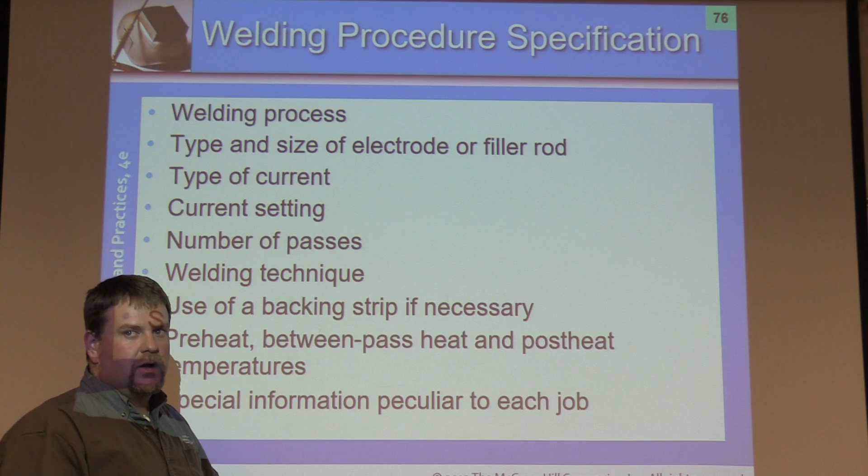This is where we start to see why I talk about the essential variables. All these things, you start changing one of them. Welding technique, for example, whether it be a stringer bead or a weave bead, we're putting a lot more heat in on a weave bead. However, we're filling it up and putting a lot more iron in. Stringer bead's going to be less heat, but it might take a little bit longer to do because you're going to have more filler passes to clean and so forth.

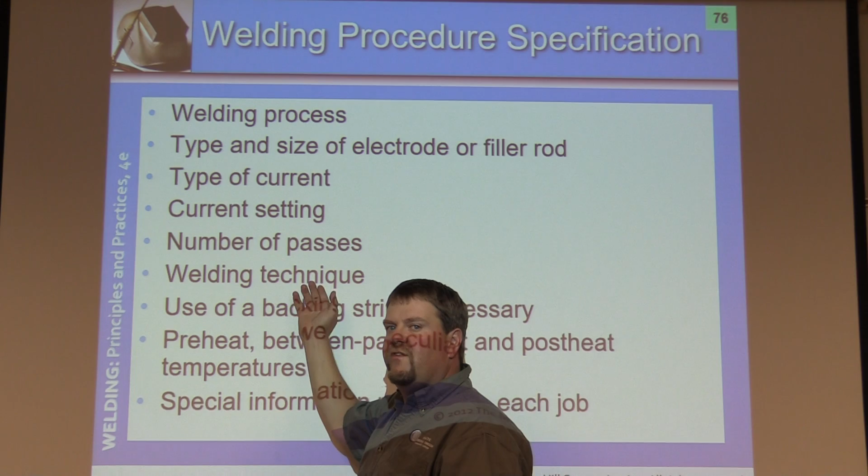If you change any of these variables, say the welding technique, whether it's specified as stringer bead or weave bead, and you change that variable, it's no longer the same procedure. It needs to have a new procedure written to it.

Same thing with diameter and wall thickness of pipe. Most codes will tell you, for ASME, if you weld a 2-inch pipe, you're qualifying 2-inch pipe, you're good for everything above and every diameter above that. However, your wall thickness is still limited. Now, if you qualify on a super coupon, you're allowed to go up to—a super coupon is going to be 5/8 inch thick wall, a real heavy wall material.

If you weld that out and pass that test specifically, then you're allowed to weld up to 1.5 inches thick, from 1/8 of an inch thick to 1.5 inches thick pipe wall, any diameter whatsoever. That's why it's called a super coupon. If you can pass it, for most common weld purposes, most common piping systems and sizes, you're going to be able to weld all of those.

Root opening, everything, position of welding—uphill to downhill—you don't just get to choose. It's either uphill or downhill or both, but in the exact order it needs to be. You don't just get to start choosing and say, hey, I'm going to weld this downhill or uphill.

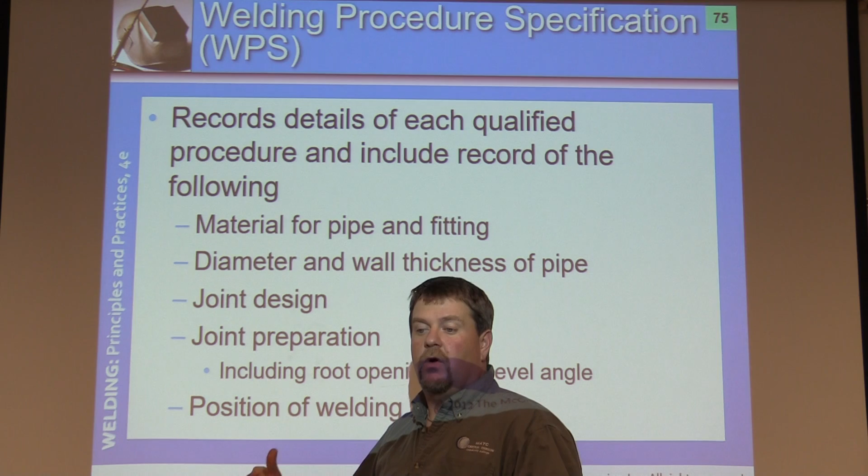Now, if there's no code, if you're not welding to a code, then yeah, you can change the majority of this. But if you're on a job and you're welding to a code, you have to follow that procedure. That is crucially important. So many people go out there and they think, well, I'll just weld it the way I've always welded it. No, you're no longer following the procedure. You can, and more than likely you're guaranteed to get fired by doing that. You have to follow the procedure in order for the insurance company to cover it.

Now we come back to the procedure qualification test. So what we're going to do, as a CWI, say somebody sends me—say an engineer sends me a procedure, a WPS, a welding procedure specification. That's the spec, that's the procedure. Then what I need to do is create the PQR, the procedure qualification. This is a test, but I'm going to record it.

So it's called a procedure qualification record. I'm going to follow every one of these variables right here in this procedure. I'm going to make sure the welder's doing it, or I'm going to do it. Make sure everything aligns. I'm going to record it. I'm going to time you. You weld one welding rod.

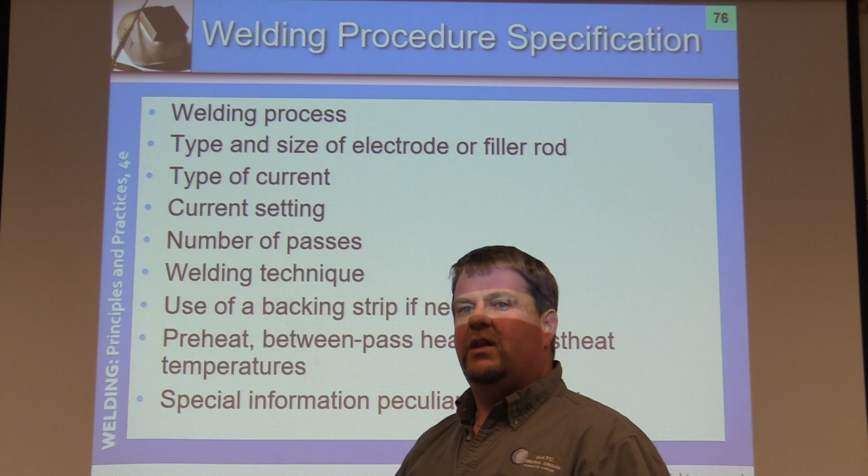You're going to start welding. I'm going to start the stopwatch. You're going to weld, say, 4.5 inches in 45 seconds. I stop the stopwatch. I measure how far your weld is. I'm going to put that in. We're going to calculate the heat input. I have to record that and put that into the values of the procedure qualification record.

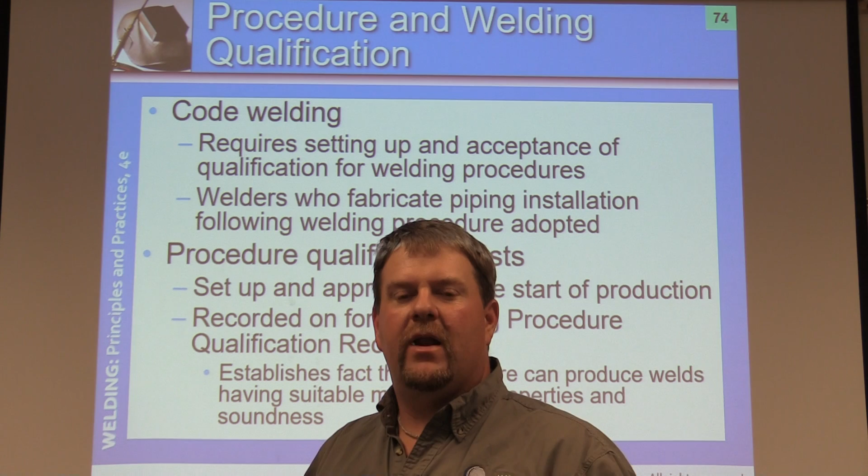So the WPS says this is how we're going to do it. The procedure qualification test means I'm going to come back and prove that the mechanical properties of this weld are compatible. The mechanical properties are able to be joined together, it's able to be welded, and they're compatible. There's not a problem with that portion of this. It establishes the fact that procedures can produce welds having suitable mechanical properties and weld soundness. Again, we're not done yet.

Weld soundness depends on the welder performance as well. But if the welder performance is good, it should be a sound weld.

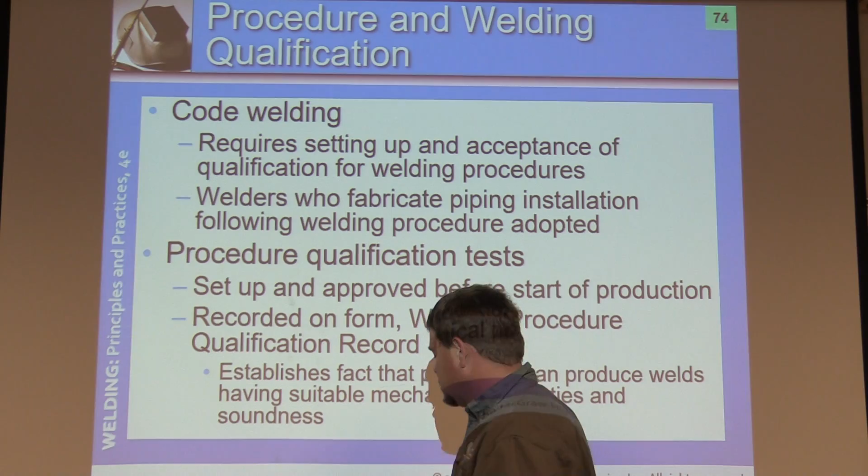Now, we go up here to the code welding. So the next step is going to be a welding procedure qualification record, or a test. So now it's called a WPQR. Now what that means is that you physically performed that weld within the guidelines of the procedure.

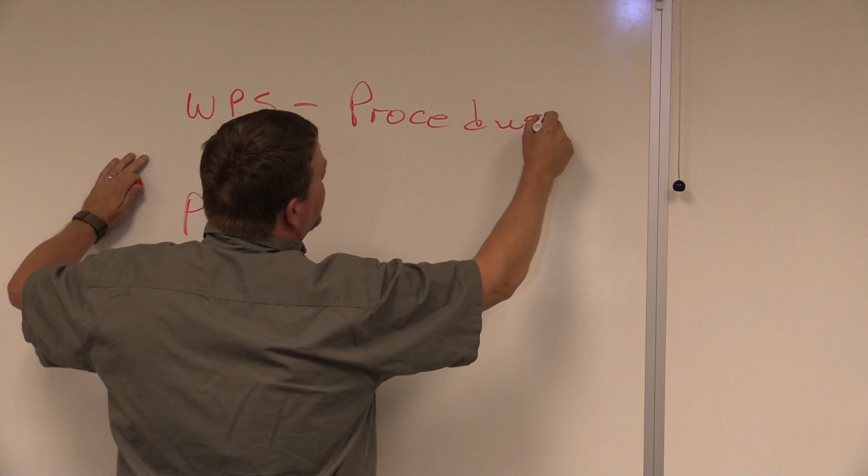So, WPS, Welding Procedure Specification - I'm going to abbreviate it. I recommend that you write this down so you know it. This is the procedure, these are rules to follow. This is your recipe.

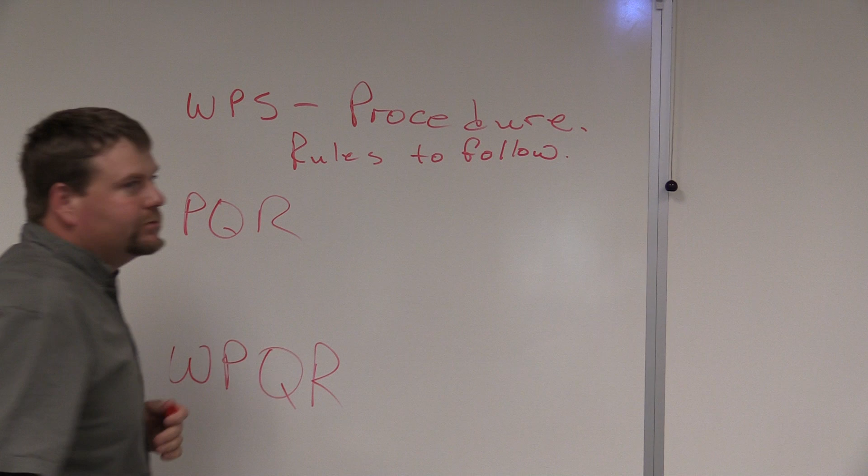The PQR, Procedure Qualification Record, this proves mechanical compatibility.

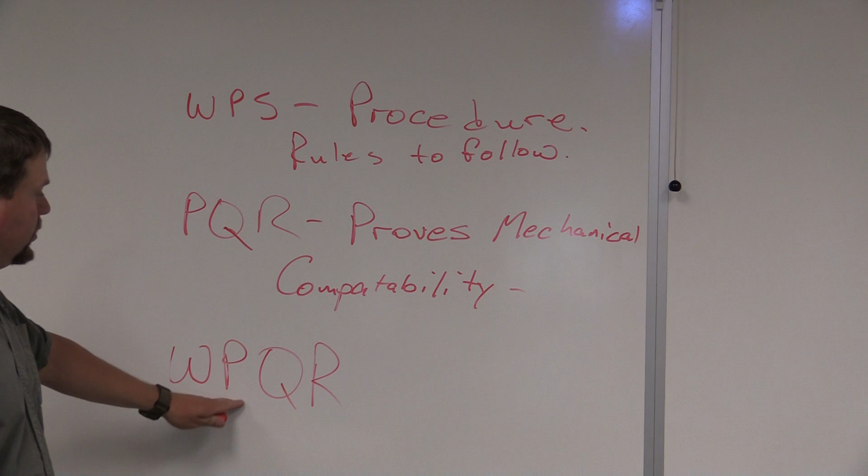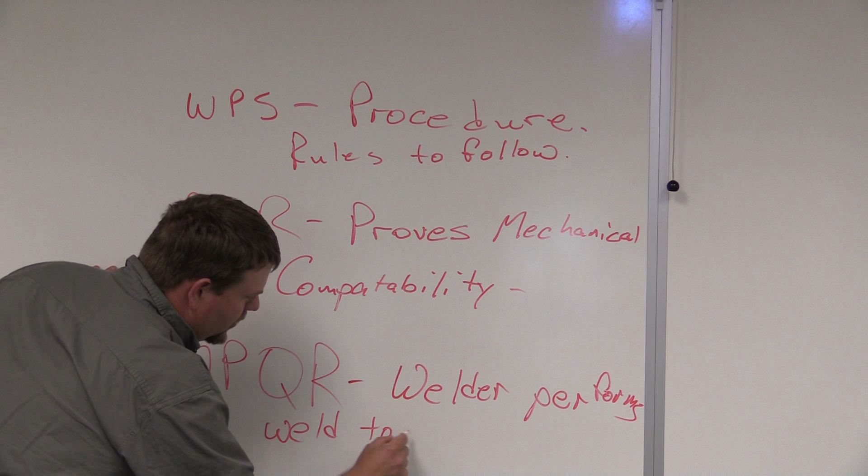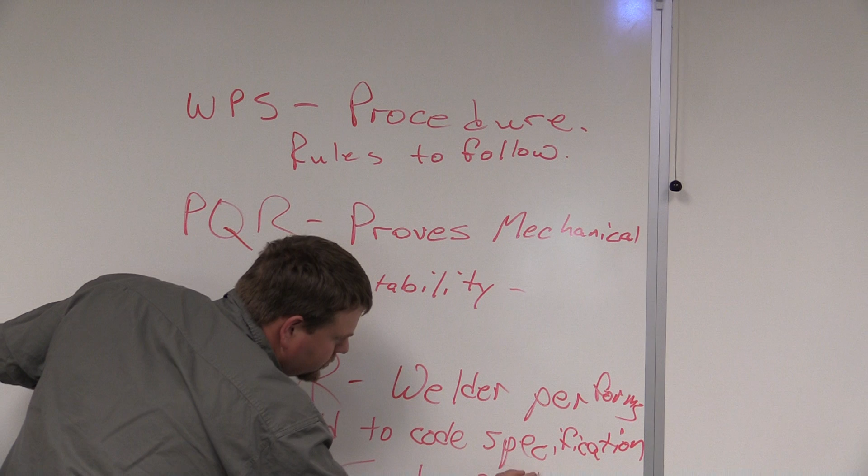Now, the Welder Performance Qualification Record means that the welder performs the weld to code specification. This is a sound, good weld. I would make sure that you write that down and you understand the three very well.

Now, a lot of times there's a difference between a tested or qualified welder versus a certified welder. So let me clarify this real quick.

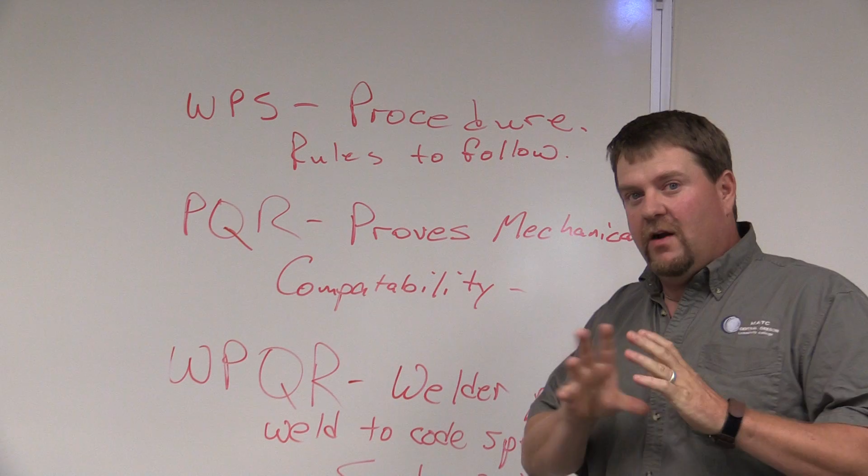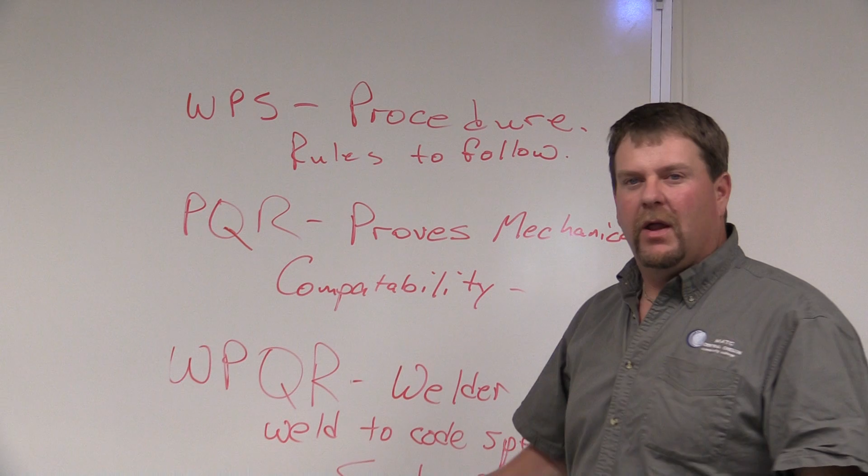You can take this test, the Welding Performance Qualification Test. If you produce this weld applicable to code standards, then you are a qualified welder. That means you are able to do this.

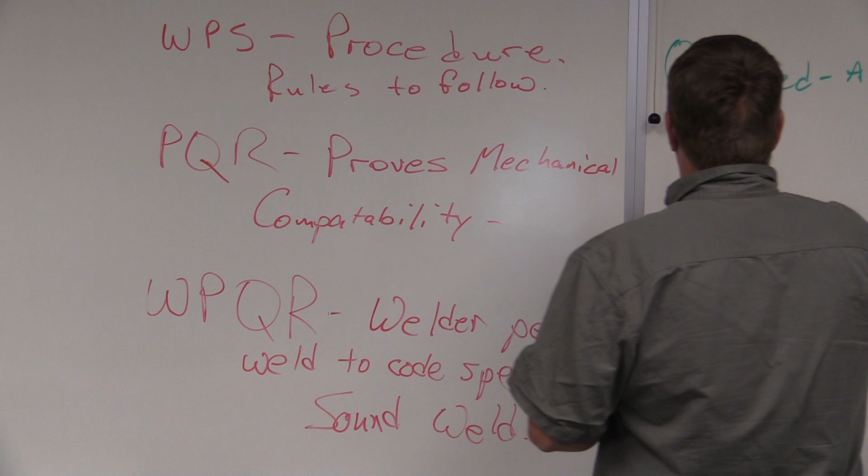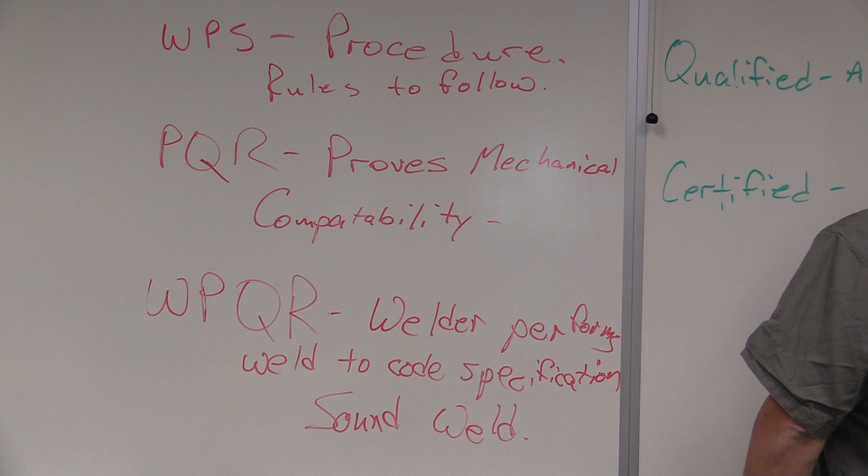Now, once we are done with that, then what happens is, for example, me as the Certified Welding Inspector, I will write the papers to document it. So I'm going to switch over here.

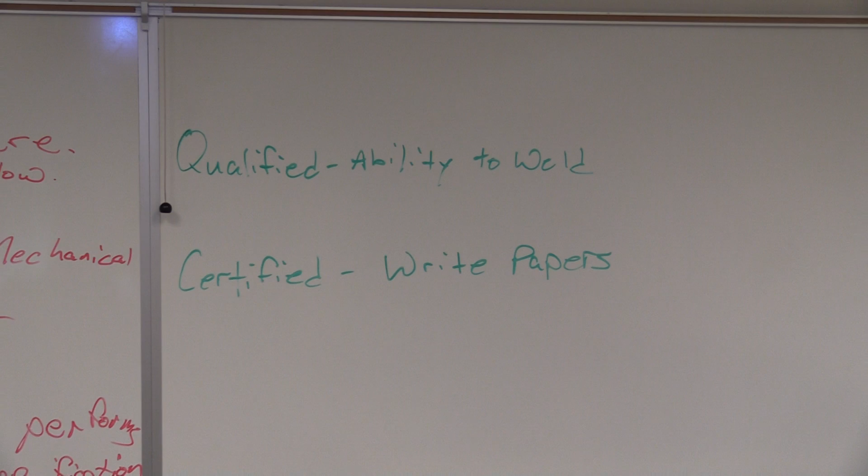Qualified is the ability to weld it, it means you passed it. Certified means that now the inspector or the qualified person has written you the correct documentation to prove that you are a certified welder.

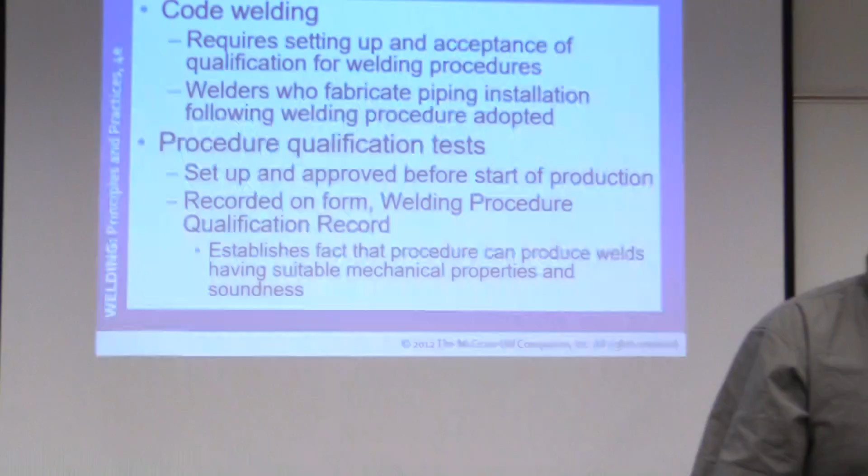Certain changes can be allowed. However, typically most companies and most insurance companies are very hesitant to do that.

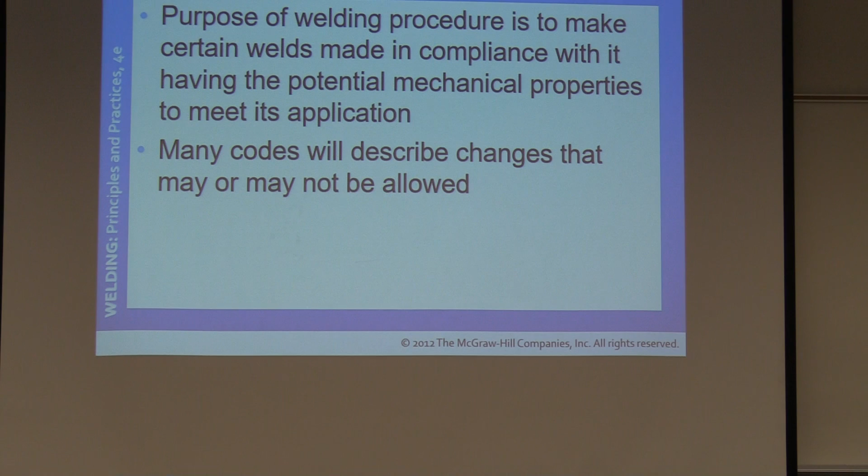Here's your essential variables versus your supplementary essential variables and non-essential variables. Those in which change is considered to affect the mechanical properties of weldments shall require a requalification of the WPS.

So that means if you change the material, the pipe material that you're welding, from an X52 to an X42, or from an X52 to an X70, it's automatically an essential variable - you have to requalify that procedure. You don't just keep welding on it.

Supplementary essential variables - this is an addition. They're required for metal, where notch toughness tests are specified. This comes into play when you start seeing a drastic temperature change.

Something where the service condition is going to see 250 to 300 degrees versus sub-zero outside temperature, where you don't want your grain boundary to shrink, creating fatalities or safety issues due to elements changing within the weld and the metallurgy.

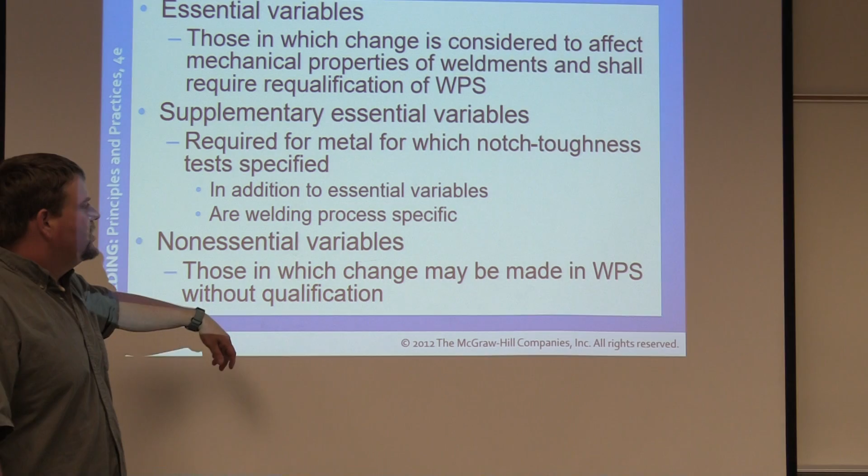Non-essential variables are those in which changes can be made in the WPS without qualification. So usually what happens is they'll give you a range on the procedure.

So say the size of electrode that you're using - they may tell you 3/32 inch diameter up to 5/32, and give you a range. You can use those three different sizes: 3/32, 1/8 inch, or 5/32.

If it was 5/32, and it may say you can go lower - those are non-essential variables. However, they usually give you a range, and there's a certain way you can go. If you weld with a larger size, then typically you can go lower, however there's more heat input for the larger electrodes.

So if your procedure states 1/8 inch is the max, you cannot go to a 5/32 inch diameter electrode on your welding rod. That's considered - the heat input changes the metallurgy, then it becomes an essential variable, not just a non-essential one.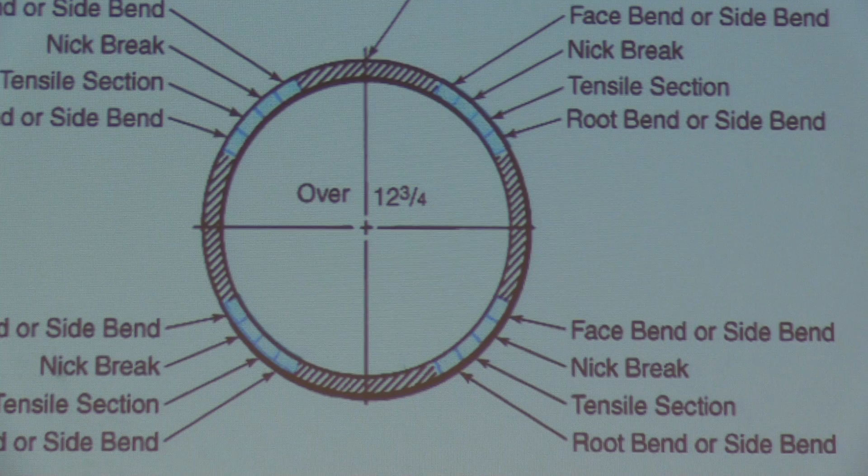So we talk about essential variables - let's look here, over 12 3/4 inch diameter. Now, if it's under 12 3/4, we won't have to pull as many specimens.

So this is 14 inch pipe, or most typical say 36 inch pipe, 24 to 14 - let's go with that. When I'm done welding this, I'm going to have to pull 16, cut out 16 different coupons and test them.

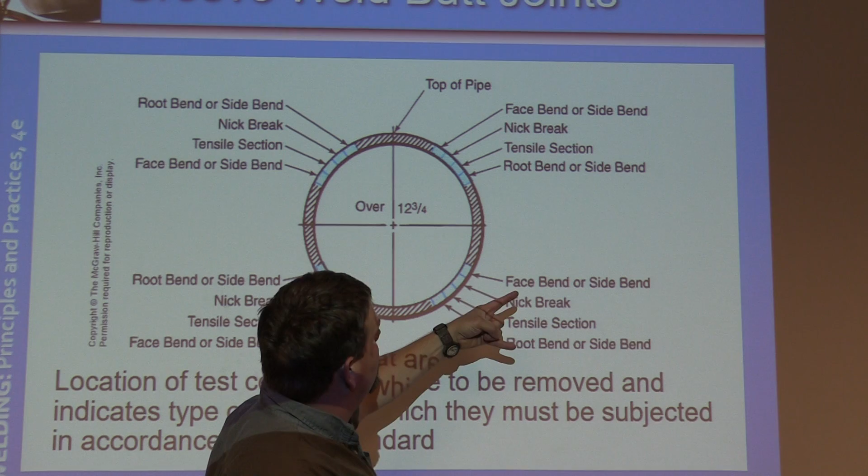As you can see, this has got a root bend, a face bend, face, root, face, root, face, root. So right there alone, I've got 2, 4, 6, 8 welds, 8 bends that I have to make out of this pipe. In the shop, we only do 6 inch, you're only going to make 4. Now, all of a sudden, I've got 4 times as many.

2, 4, 6, 8, and twice as many. We're getting to it though.

Now this right here, this nick break, this is specific to API 1104 alone. So where we take it, we put a nick in it in the center of the weld, and we pull it apart to see if the internal parts, specifically slag along the hot pass, is present within that weld.

So now we just picked up 4 more tests, right? Then we're also going to take a tensile section. What they do is we're going to put it in a tensile machine. We're going to measure how much force it takes to pull apart. Now it also has to break outside of the weld zone, and if it does break within the weld, the pressure it breaks at has to be at least above the tensile strength of the pipe.

See the essential variables? There's a ton of this stuff. So now, instead of the 4 we do in the shop, now I have 16 coupons, and if any one of them fails, I fail.

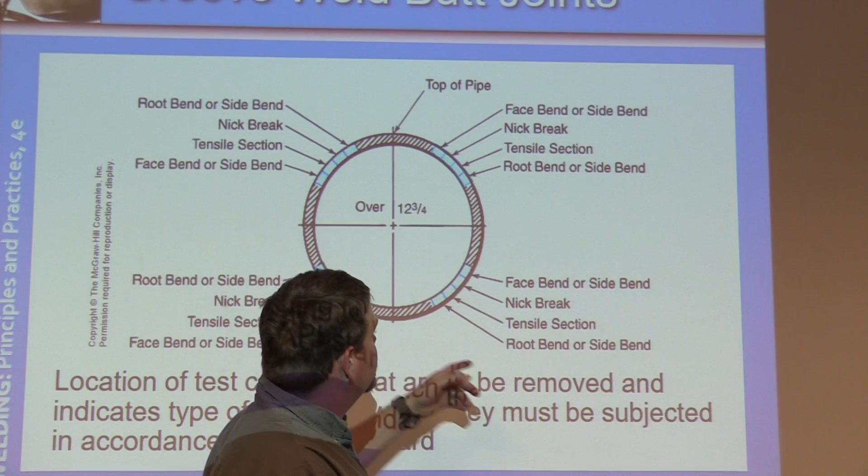So a lot of times, people don't understand. They'll go in there and do our plates, and you're going to pull out 2 coupons. When you get into production welding and high production welding, usually if you're doing this, you're going to be paid very well for it. But every time you pull on a job, you have to do this test. And you've got 16 coupons that have to pass. Not half of them, not 70% of them like we get here in class.

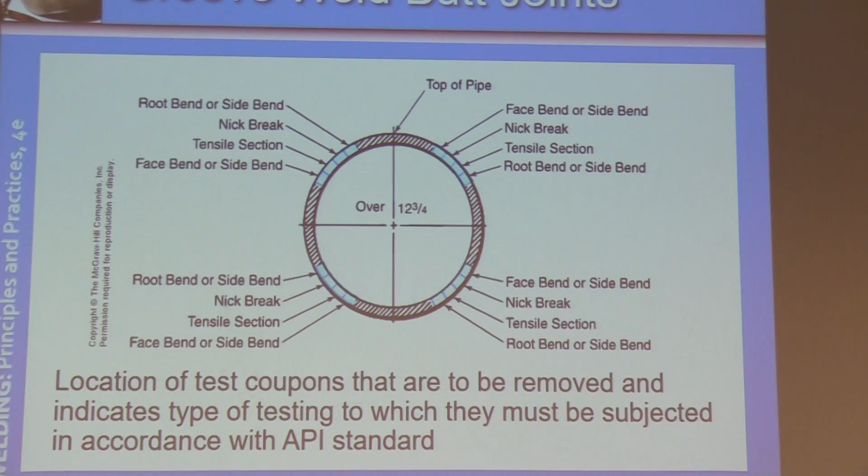As a production code welder, every one of them has to pass within 1/8 of an inch. So that's 16 coupons. It's a lot of stuff, a lot of pressure too. Usually your job is directly tied to making sure that you can pass that weld.

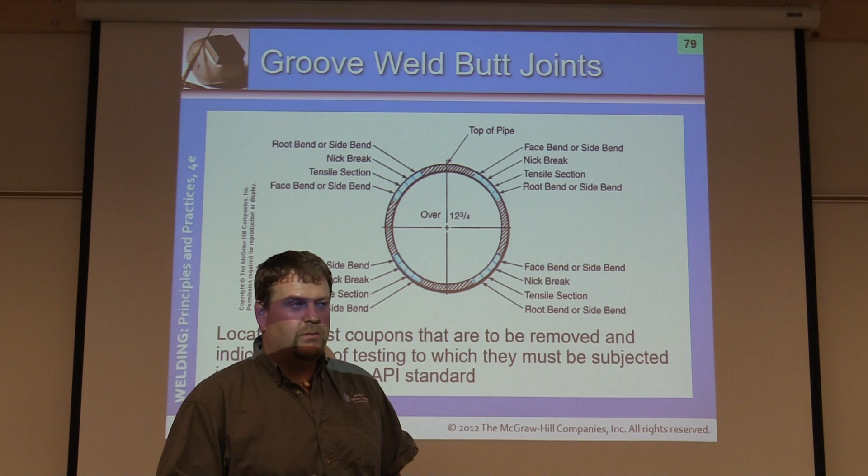That's an API code, pipelines and so forth. Yeah, they don't want anybody just welding on chemicals and so forth, or on piping that's carrying chemicals, all right?

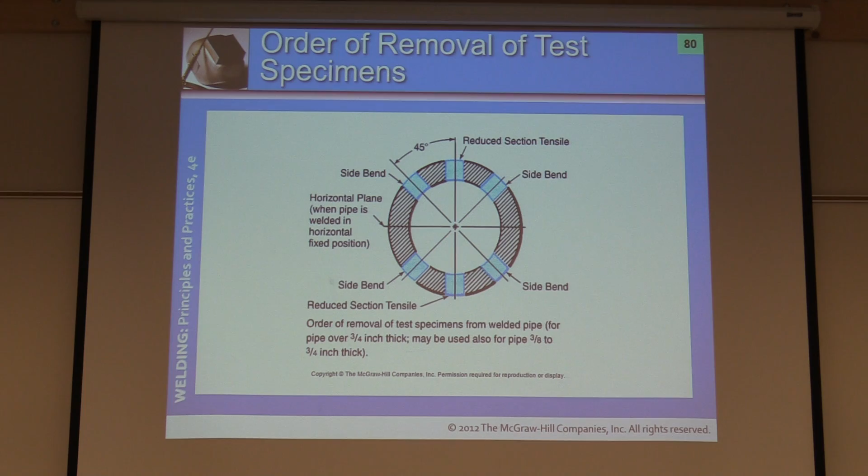Okay, so removal of test specimens. This one's an ASME, or this is also an AWS. This is for a procedure qualification record as well, okay? This is when your wall thickness gets higher than 3/8 of an inch. So right down here, when we start dealing with codes, there's an old saying that the details are in the fine print, right there.

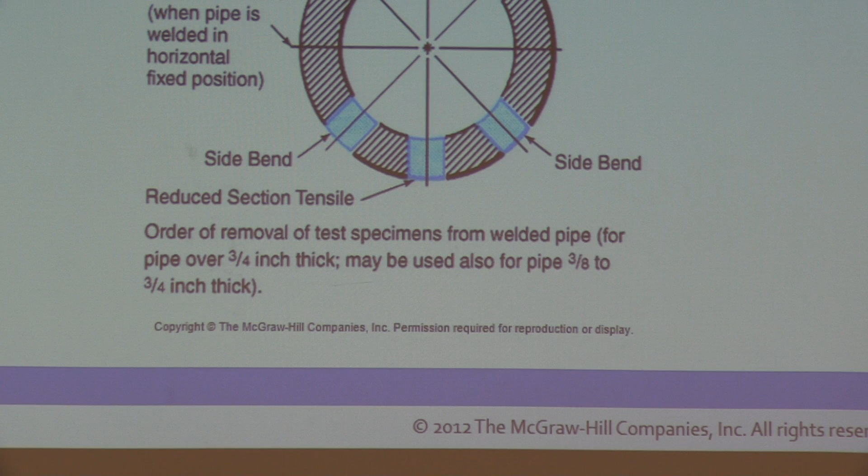Order of removal of test specimens from welded pipe, for pipe over 3/4 inch thick. May be used also for pipe 3/8 to 3/4 inch thick. So less than 375 wall, we can still do a face and a root bend. But once we go above 375 wall thickness, now we have to start doing side bends because we're putting a severe amount of stress on the weld by doing a face and a root bend because it's no longer applicable.

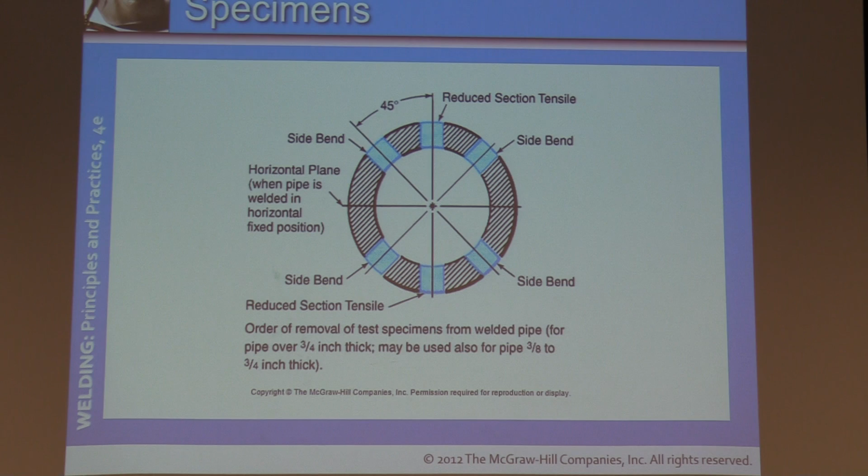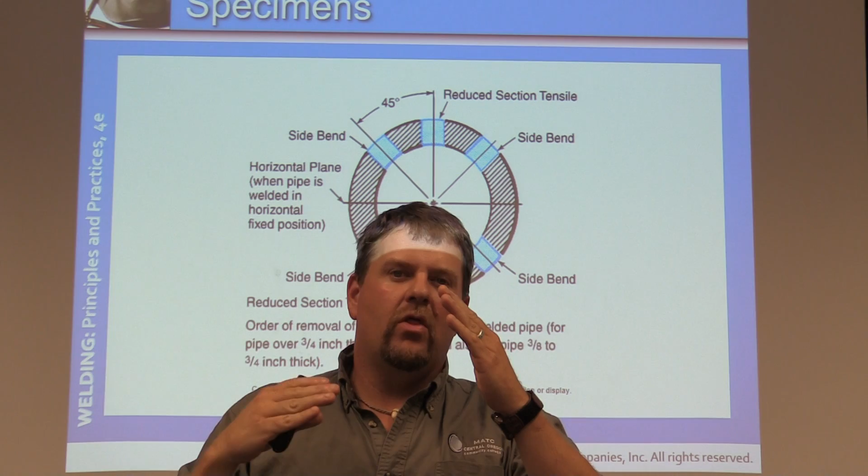All right? So these are side bends. They're 3/8 of an inch wide, and then we're going to bend them sideways. That way we can see the entire weld profile, both groove faces, fusion faces. So we're going to get a good example of the entire weld instead of just the face or just the root.

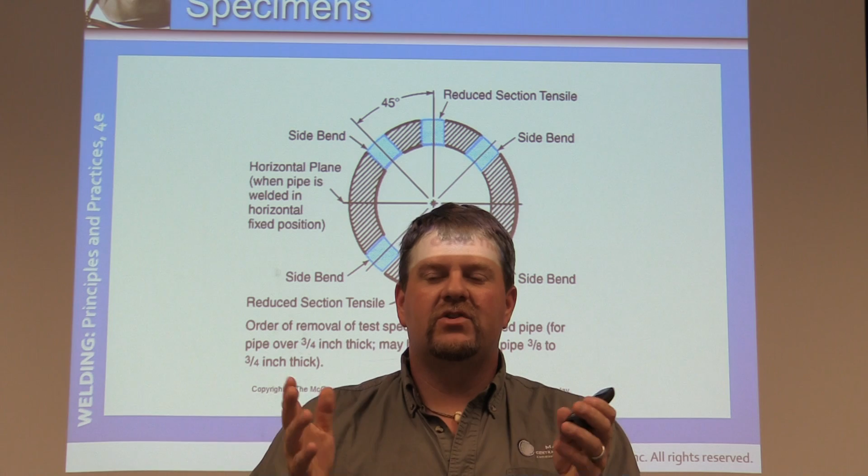Now the thinner we go, the thinner material, when we bend the face or the root, we're going to see those — they've engineered it, they've spec'd it. You're going to see the discontinuities usually show up in the thinner material. Once you get thicker, they can be hidden, okay? So there's kind of like a cushion in there. So once you're above 3/8 of an inch thick, now we start doing side bends so that we'll see any interior discontinuities as well.

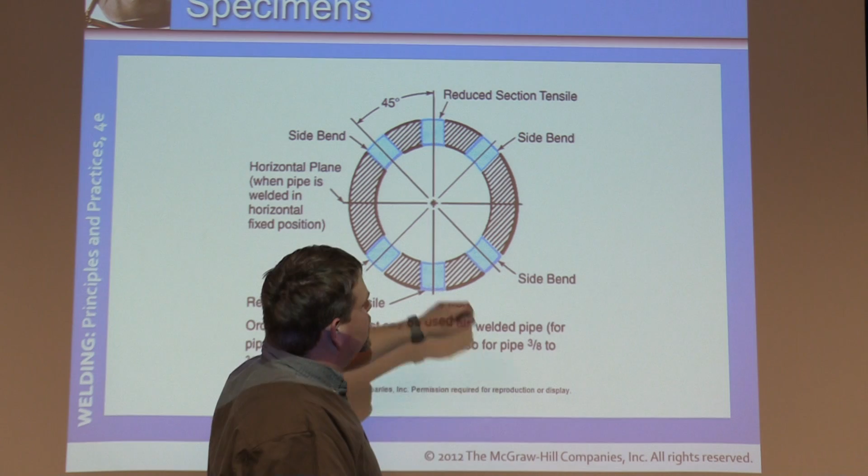Now this reduced section tensile, this is where we machine it down to a specified distance and we put in the values and we make sure that it breaks at the correct pounds of force, pressure, and everything else. We'll get into that through weld inspection and quality control, okay?

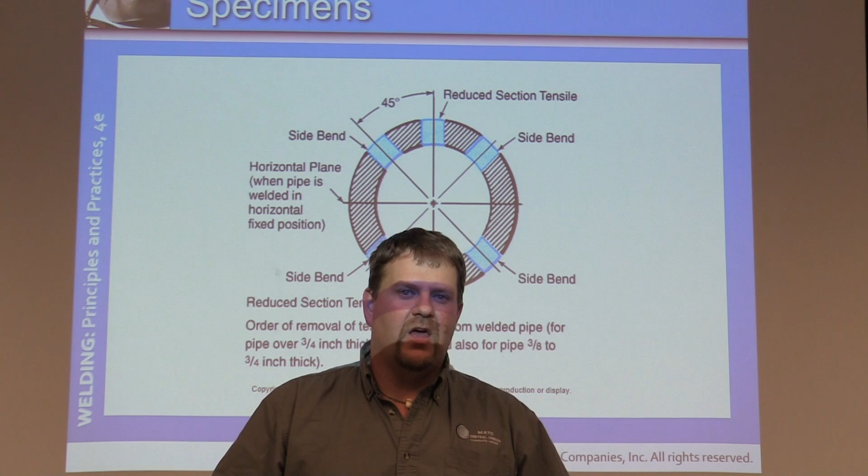But this is the beginning portion of where you have to start understanding how codes work, why test specimens are there, and why you bend them in a certain order.

So here's a good example. This is what we do in the shop. This one's for the procedure qualification record versus the welder performance. Same as this. For a welder performance, we don't have to pull the reduced section tensile, we just have to pull the 4 side bends, okay?

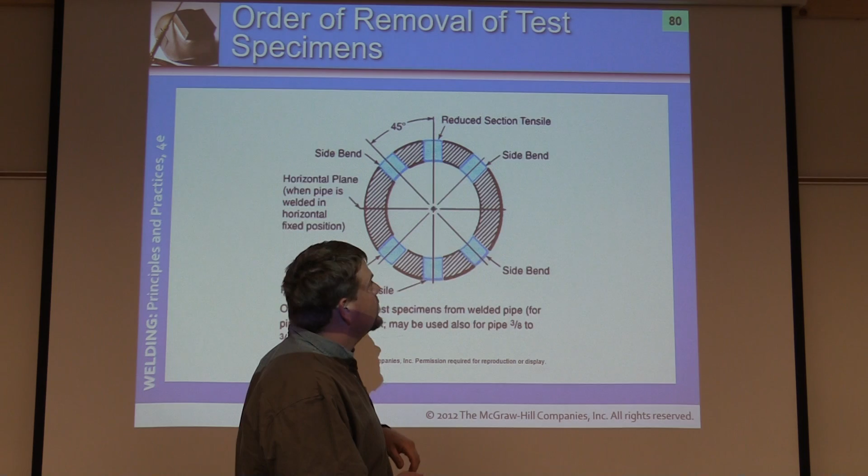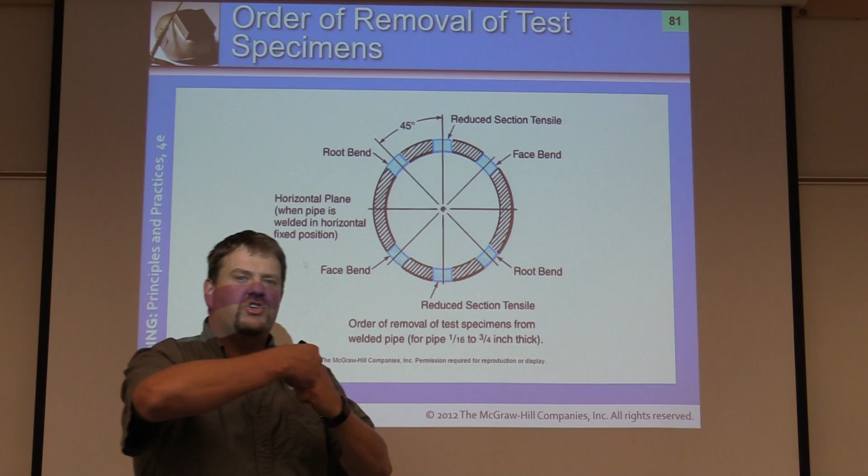For welder performance, we just pull these 4. Procedure, same thing — we have to check the mechanical properties of it, making sure the tensile strength of the weld still meets or exceeds the tensile strength of the material that has been welded, okay?

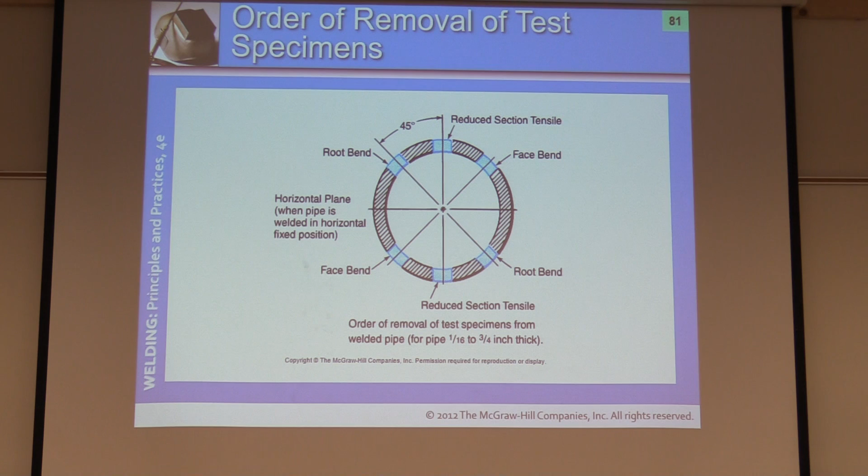So as you can see, they're in very specific pieces: 6G, 5G, 2G. Your face bends are opposing each other, your root bends are opposing each other. So this is a 5G pipe, this is your top half, this is your bottom half. You've got overhead and a vertical root, overhead and a vertical face. You've got a flat and vertical root, flat and vertical face, okay?

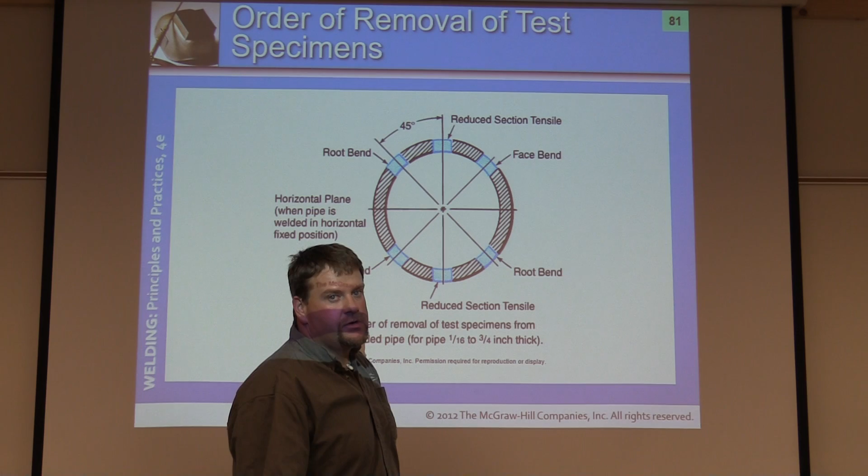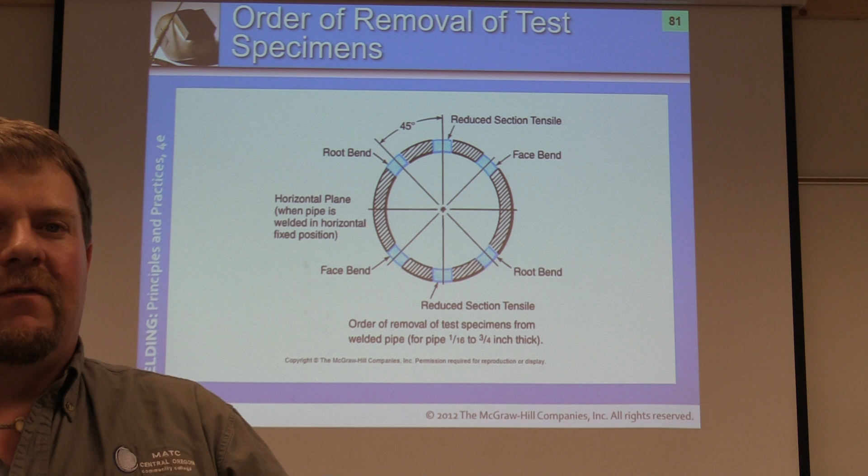They felt that by setting these at a specific point, you were getting a good range of abilities, of a welder's ability.

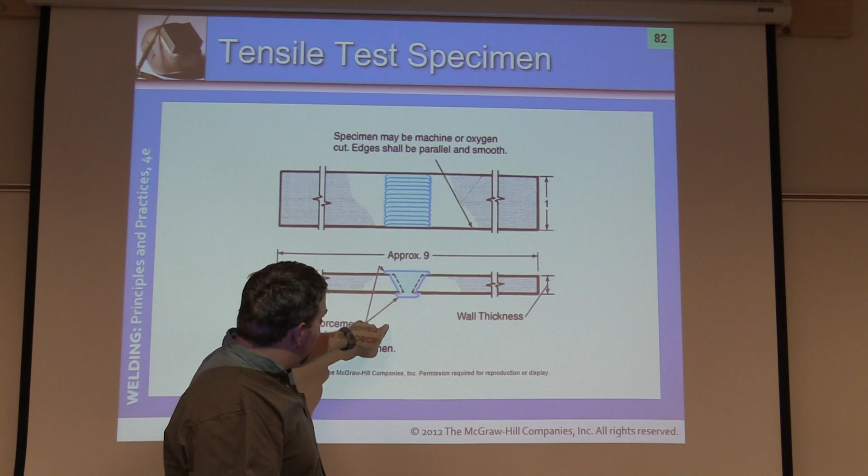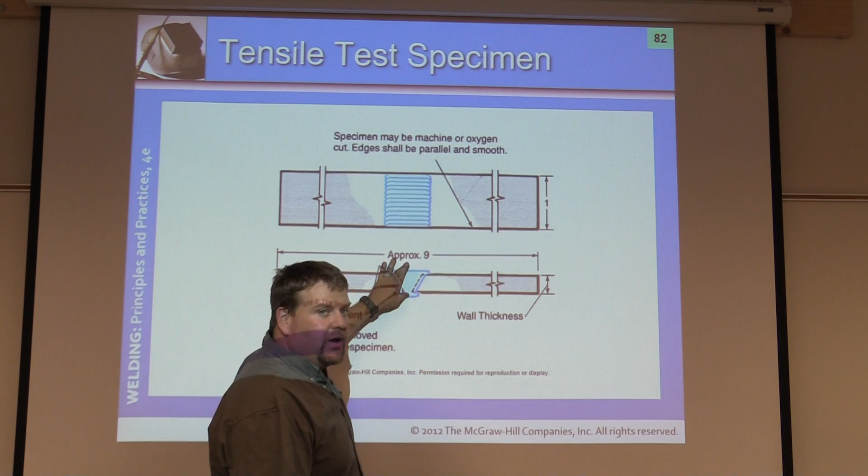Tensile test specimen - it may be machine or oxygen cut, preferably flame cut usually, okay? And then we can break it from there. Now this is not a reduced section tensile, this is a full strength tensile, so we don't touch anything. The weld reinforcement should not be removed on either side. You pull it apart - this is API code, okay? It has to break in the base metal, or if it does break in the weld, it needs to exceed the tensile strength of the pipe, and also there cannot be any physical or visible discontinuities within the weld where it broke.

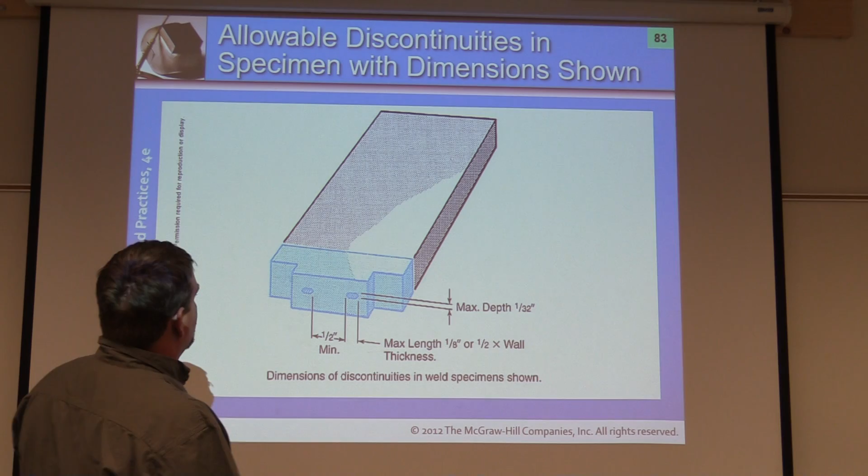Here it gives you discontinuities, so a 1/2 inch distance between the two. There can only be 1/32 deep, max length of 1/8 of an inch, or half the wall thickness. So, Schedule 40 pipe, depending on what wall thickness - let's say 6 inch, we're at 0.280. So half the wall thickness would be 0.140. 1/8 inch supersedes, it's a lot more strict. Since it's 125, we adhere to the 1/8 inch.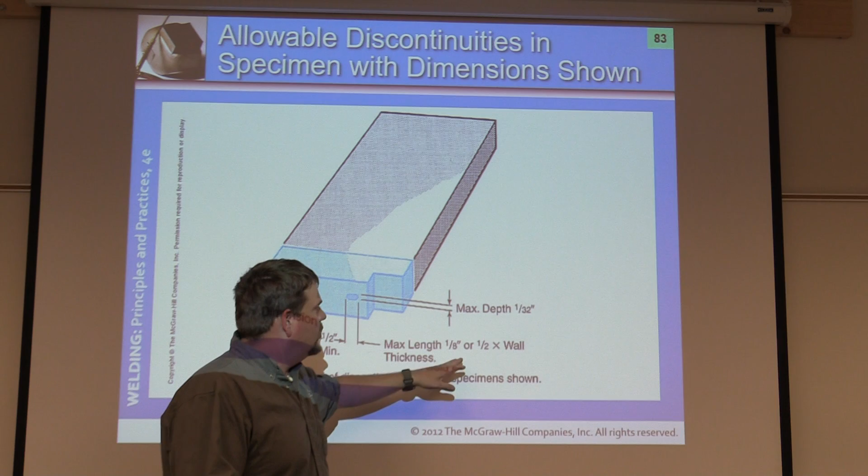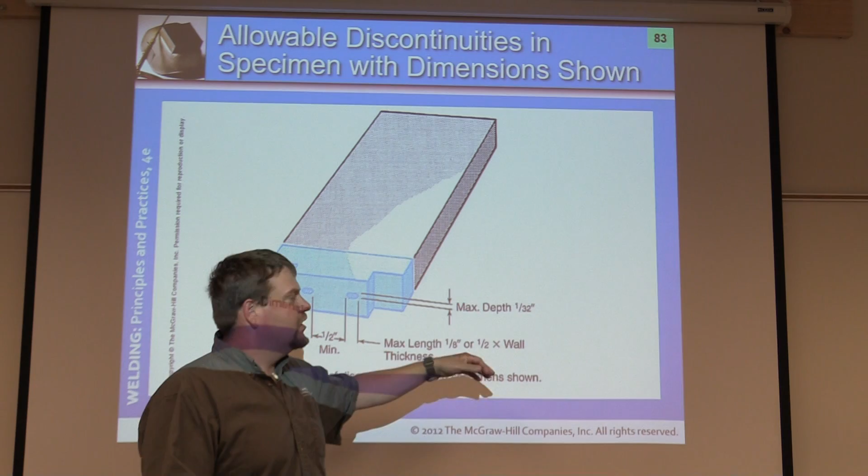Now say we're at Schedule 10, say I want to say it's like 150, let's use 150. So then half of our wall thickness is 0.075. So now we're down to a 1/16 of an inch, roughly, okay? The thinner the wall, the thinner the material, the thinner the issue, okay? And that's in your tensile.

Your prep - I will show you. You can also go consult table 16.4 and 16.5. It will tell you what is there. Let's look at that real quick.

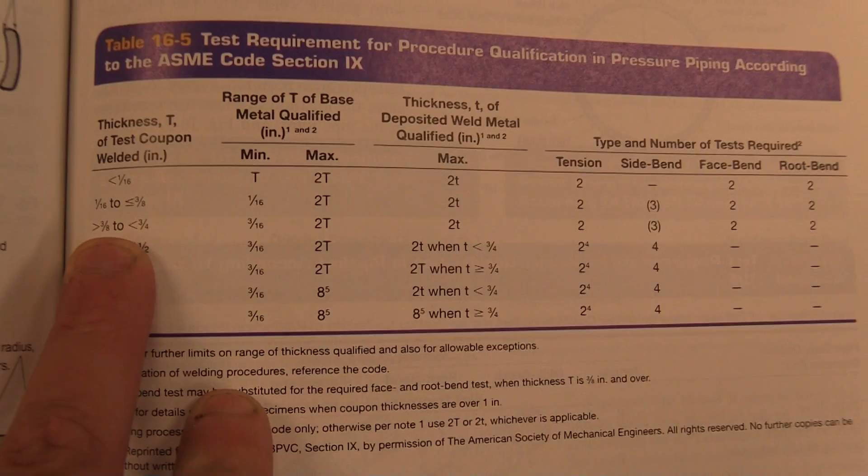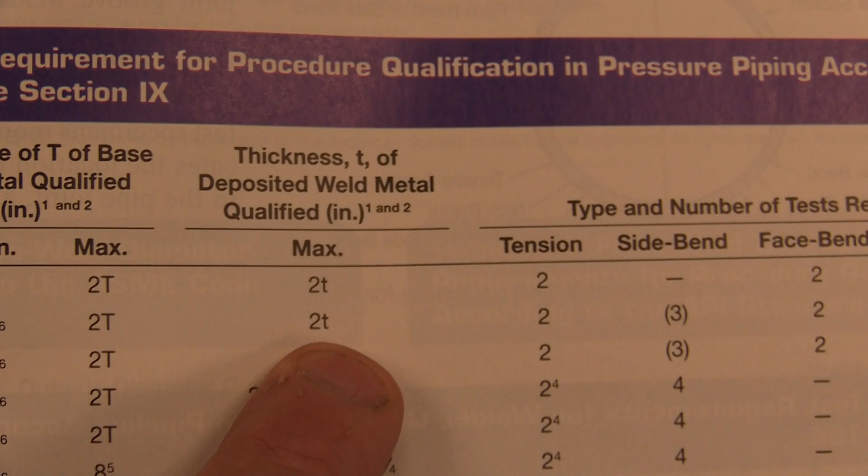So just so that we're clear on a few things, we're going to look at the ASME Section 9 right here, okay? So here's the thickness of the test coupon. In the shop we're going from 3/8 of an inch, so we're right at less than or equal to 3/8 of an inch. The range of thickness of base metal qualified is from 1/16 up to the max, which is 2 times the thickness - so if you pass at 3/8, you're qualified to 3/4. The thickness of the deposited weld metal is 2 times the thickness.

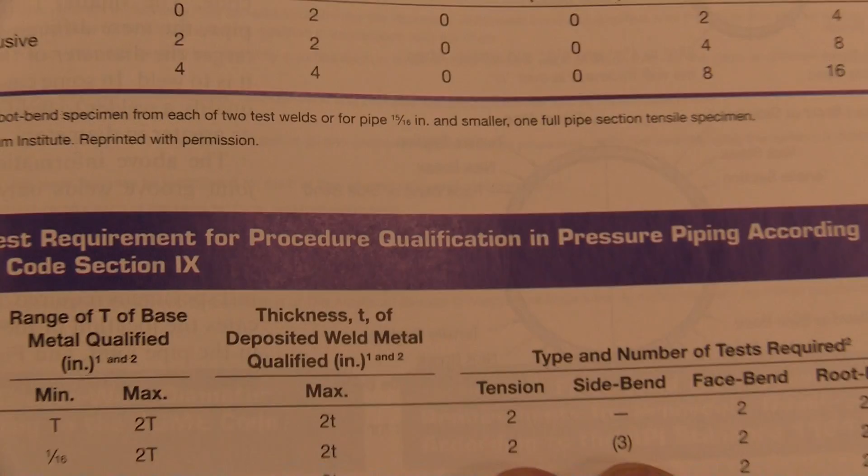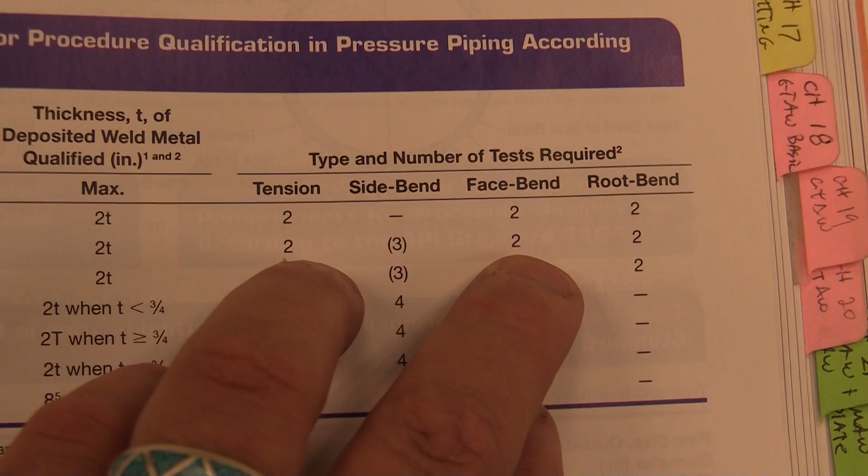How many bends should we do? So for a procedure - this is a PQR, for procedure qualification, not welder, but procedure - you have to pull 2 tensiles, 3 side bends, 2 face bends, and 2 root bends. Now, you notice these are in parentheses - I told you the fine print gives you the detail. It says that 4 side bend tests may be substituted for the required face and root bends when the thickness is 3/8 of an inch and over. So, as you can see, reading technical documents is an everyday thing as a code welder. You do get to where you start to understand them, however it can be very technical information.

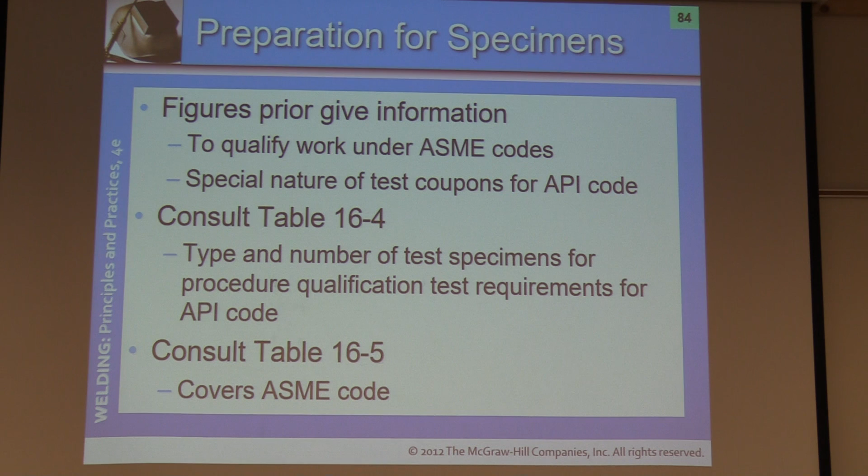All right, welding qualification tests - we're going back to that. I wanted to explain all 3 real quick to you earlier, so that way you weren't kind of wondering, so now you kind of know. We're going to talk about the welder qualification, or WPQR, or now - the welding certification test, most people call it. I'm going to go take a cert test. Again, qualification means you physically do it. Certification means you have papers for it, okay?

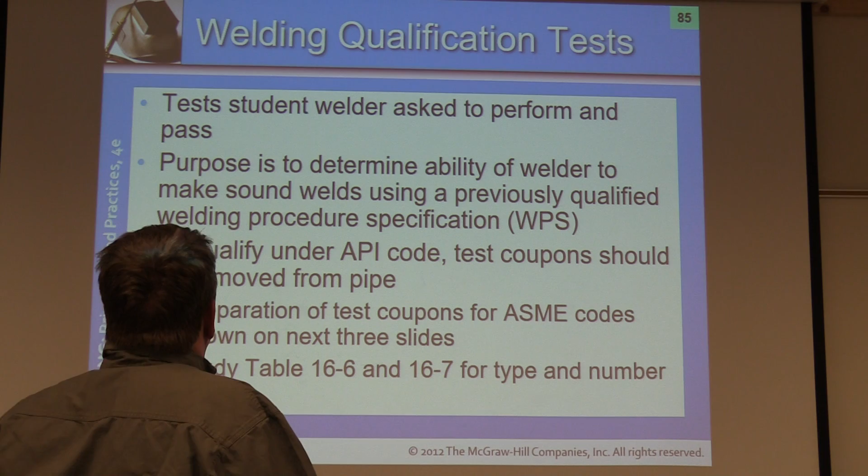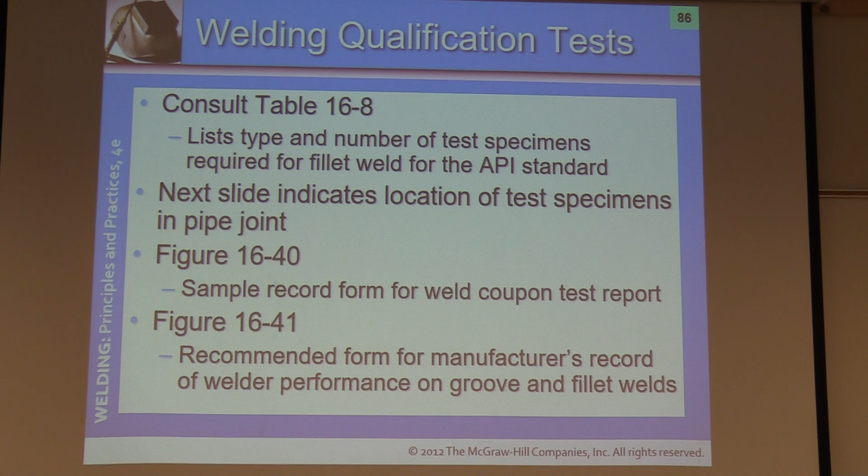Same weld, same material - if it passes, the only difference is you get the documentation, okay? So these are the tests that the welder's asked to perform and pass within the applicable code. Once you read through this - table 16.8, figure 16-40 - this is a good chapter to where you start understanding why we do what we do, okay? Why I'm having you pull test specimens and so forth. You can read through this, I'm not going to get too much in detail.

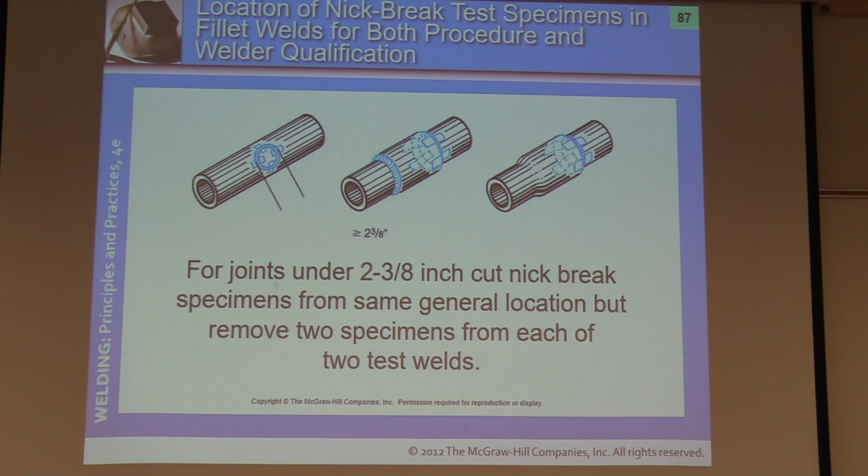We're starting to get into some really advanced stuff here. Nick break specimens from the same 2 specimens from each 2 welds - so these are in socket welds.